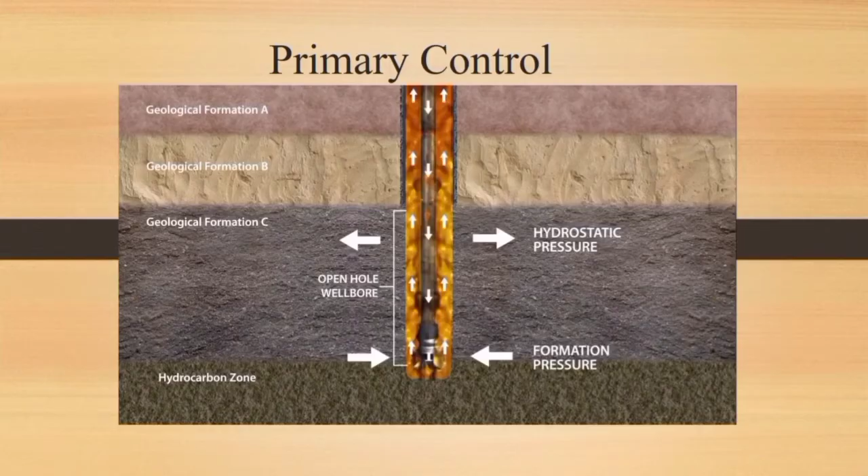Primary control is defined as control by confirming that the borehole pressure is greater than the formation pressure. It maintains a positive differential pressure, or overbalance, on the formation pressure.

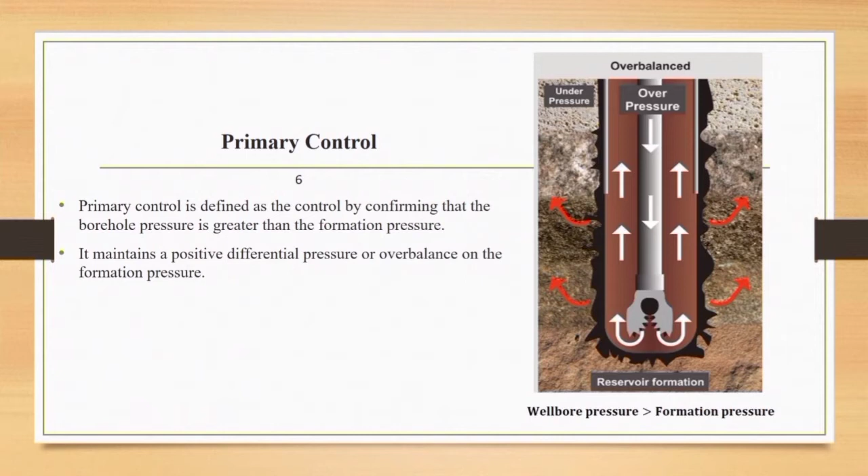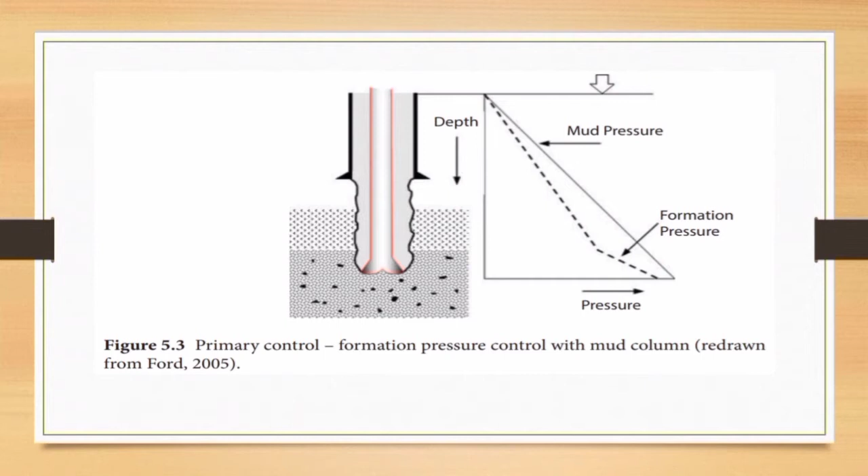Based on figure 5.3, as drilling progresses, the formation pressure increases at a constant rate. But as it reaches a new formation, the pressure spikes at a high rate. In this case, the mud pressure should be higher than the formation pressure to avoid the occurrence of a kick.

This control may be mislaid toward a higher formation pressure than wellbore pressure in two ways. The first reason is if the formation pressure is not correctly predicted. For instance, if reservoir engineers or geologists predicted the formation pressure lower than expected, the drilling engineer would have programmed a mud weight that was too low. Therefore, the bottom hole pressure would be less than the formation pressure.

The second reason is if the pressure due to the column of mud decreases for some reason, and the bottom hole pressure drops below the formation pressure. Since bottom hole pressure is a product of mud density and the height of the mud column, the pressure at the bottom of the borehole can only decrease if either the mud density or the height of the mud column decreases.

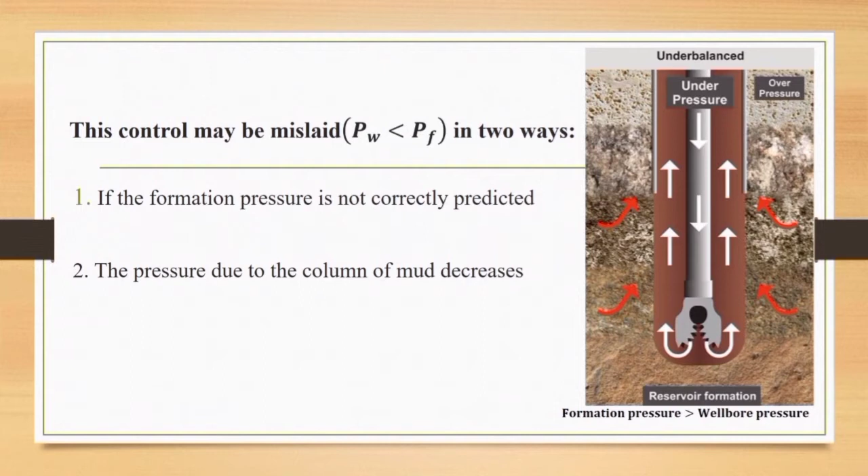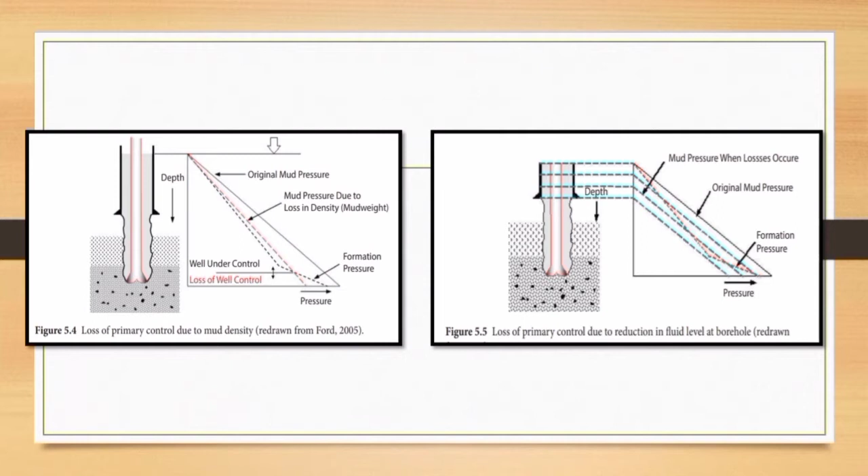There are different reasons for the reduction of mud weight and/or the hydrostatic pressure of the mud column under normal drilling operations. The following are a few of those reasons: 1. Low mud weight. 2. Reduced height of mud column.

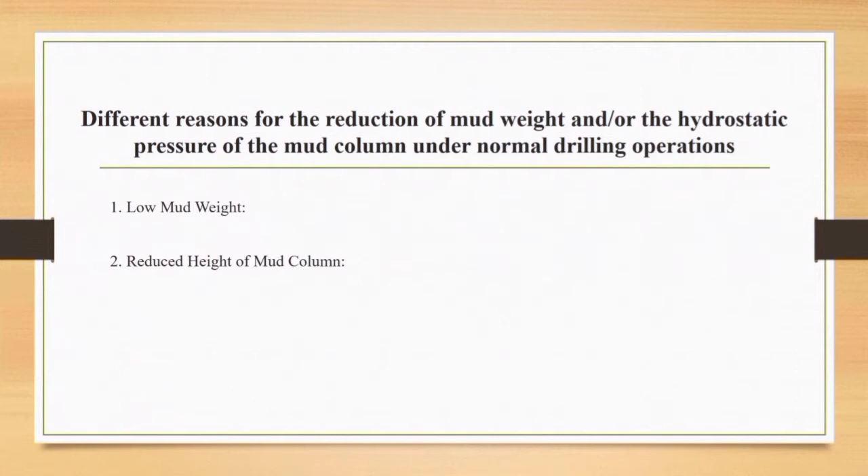1. Low mud weight. There are many reasons that influence the mud weight. It may be too low due to A. an overpressured zone which may have been penetrated, requiring a heavier than normal mud weight.

B. Gas cutting of the mud. C. Excessive dilution of the mud or water contamination. And D. Inaccurate measurement of fluid density.

The normal industry practice is to keep the overbalance pressure at around 200 to 300 psi. If there is a large amount of overbalance, the rate of penetration (ROP) will be reduced, and as a result, cost per rate of penetration over time will increase, which is an uneconomic situation.

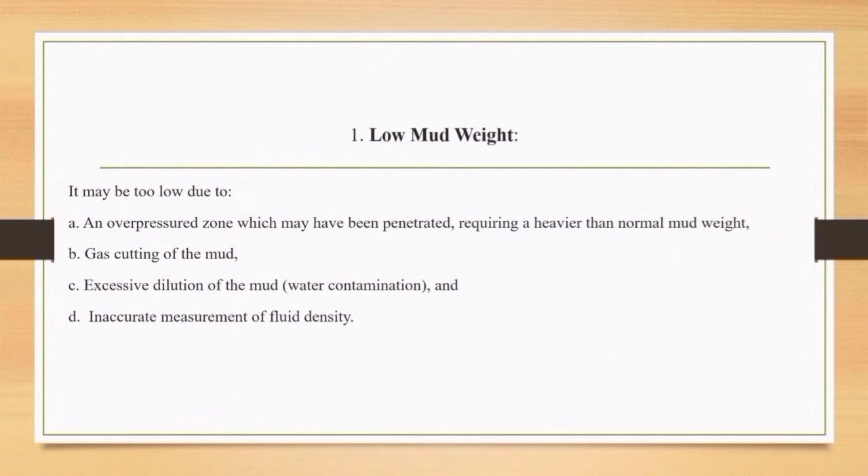If the mud weight becomes less, the developed overbalance will be less, and hence the risk of having a kick increases. B. Solids removal.

The cuttings must be removed from the mud to allow efficient drilling when the mud returns to the surface. If a very fine screen is used on the shale shaker, a large amount of weighting solids, especially barite, may also be removed.

The screen size should be selected so that the shale shaker removes only the larger particles related to the formation, while the finer material drops out and the sand settles.

C. Dilution. When the mud is being treated to improve some property like viscosity, the first stage is to water it back in order to lower the percentage of solids. Water may also be added when drilling deep wells where evaporation may be significant. During these operations, mud weight must be monitored carefully.

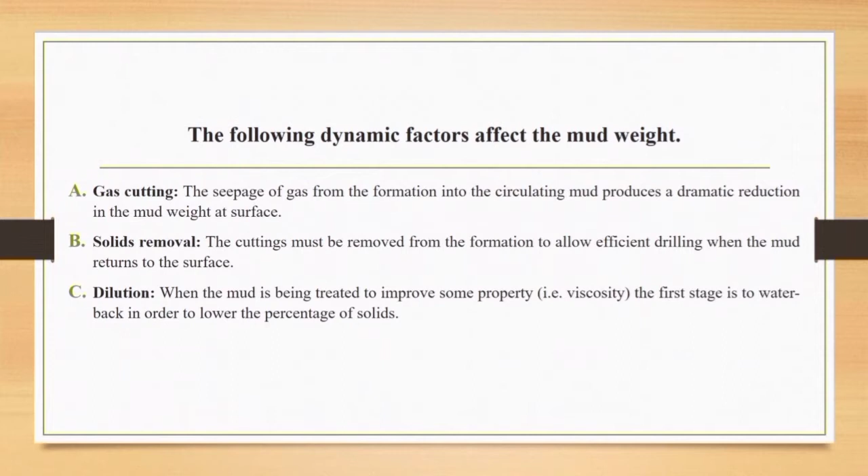2. Reduced height of mud column. Under normal drilling operations, the volume of mud pumped into the borehole should equal the mud returned. In such a case, when mud pump operations are stopped, there should not be any fluid flow from the well, and thus the level of the mud pit should not fall below the mud pit level. However, this is not always the case.

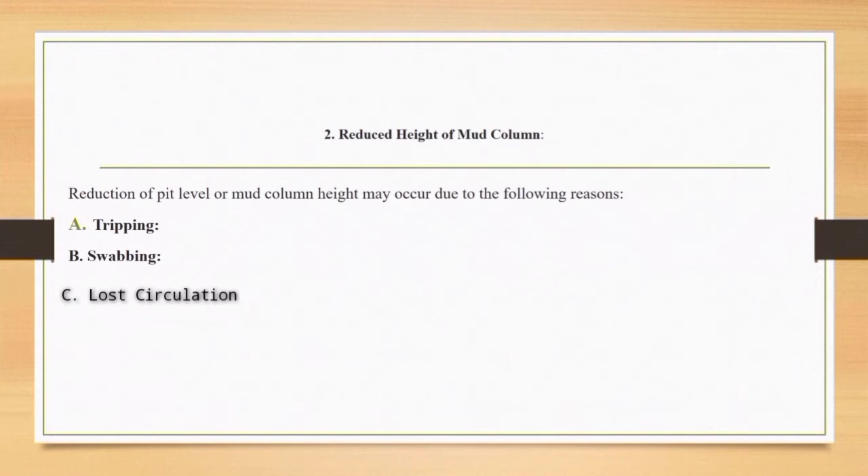Reduction of mud pit level or mud column height may occur due to the following reasons: A. Tripping, B. Swabbing, and C. Lost circulation. A. Tripping: when the drill pipe is pulled from the borehole during the tripping operation, the top of the mud column will fall down.

This results in a reduction in the height of the mud column above any point in the wellbore, which creates a decrease in the bottom hole pressure. Therefore, the open hole must be filled up while pulling out of the hole, which is done using an equivalent volume of drilling fluid.

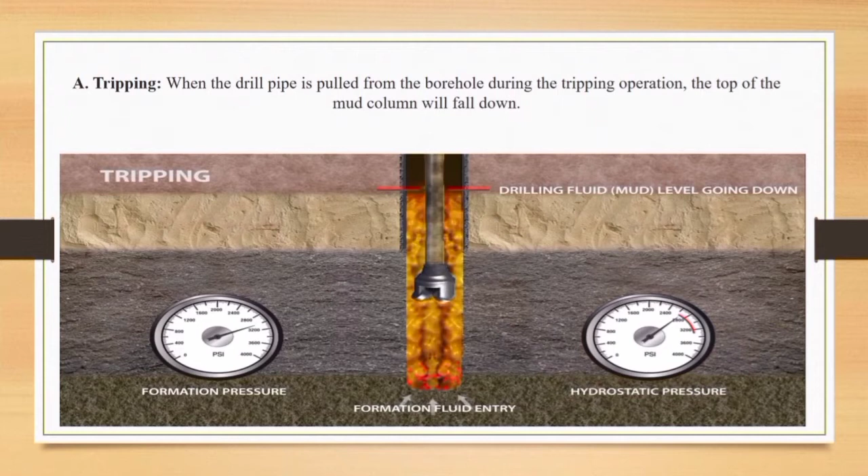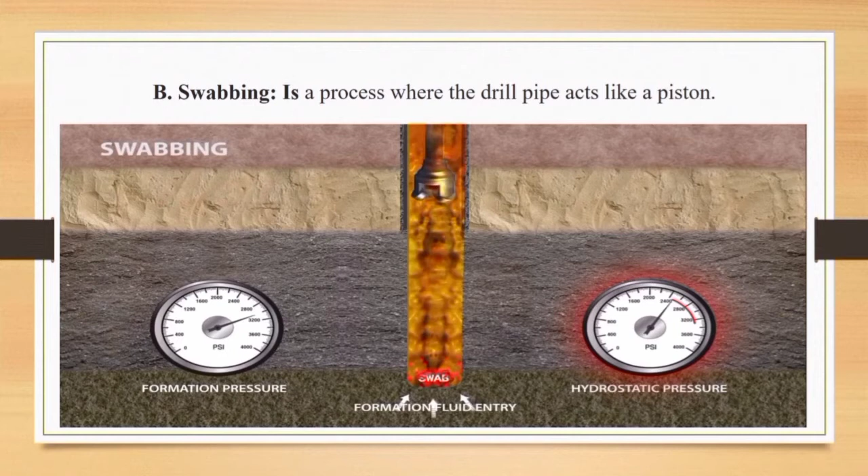Swabbing is a process where the drill pipe acts like a piston. During the upward motion of the drill pipe, it creates a region of low pressure into which formation fluids may flow. The opposite effect is known as surging, when the pipe is run into the hole.

The amount of swabbing will increase with: 1. The adhesion of mud to the drill pipe. 2. The speed at which the pipe is pulled. 3. Use of muds with high gel strength and viscosity. 4. Having small clearances between drill string and well bore. 5. Thick mud cake. 6. Inefficient cleaning of the bit to remove cuttings.

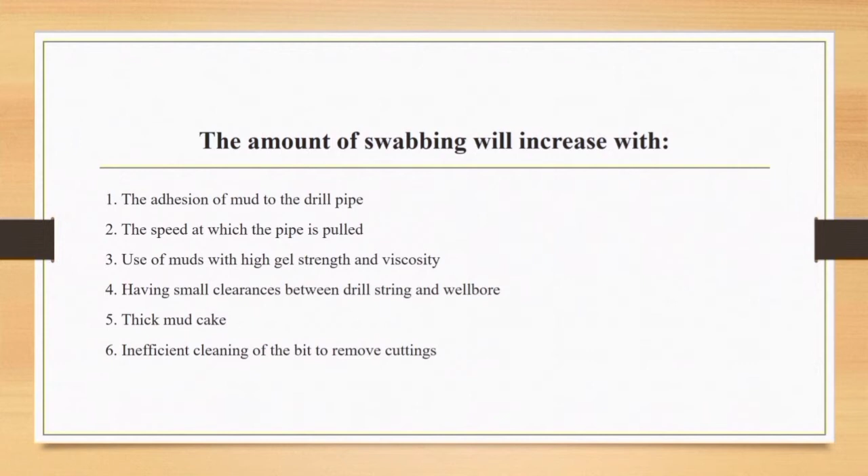Lost circulation. This occurs when a fractured formation is being drilled. Whole mud is lost to the cavities in the rock, which reduces the height of mud in the borehole. Lost circulation can also occur if too high a mud weight is used and the fracture gradient is exceeded.

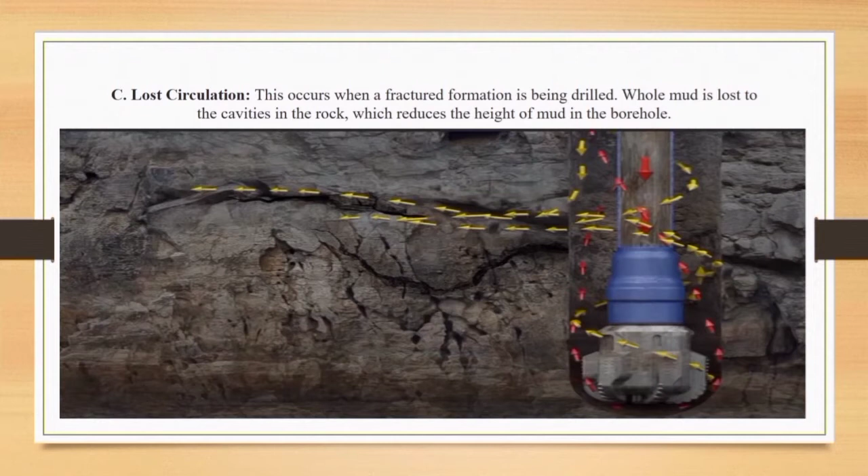Warning signals of kicks. A blowout does not usually happen suddenly. While drilling, the crew must be watchful. They should know the warning signs at the surface and be able to understand the influx at the bottom of the borehole. An alert crew can see the warning signs, and if interpreted correctly, the well can be saved by immediate correct actions.

Even though these signs may not necessarily always positively identify a kick, they do provide a warning and should be monitored carefully. Sometimes the driller observes several indicators at the surface which might be due to events other than an influx. As a result, the signs are not always final.

For example, if the drill bit enters an overpressure zone of a new formation, the rate of penetration will increase. This might happen due to the new formation encountered by the bit. On the other hand, there are some indicators that need to be monitored continuously to restrict having a kick.

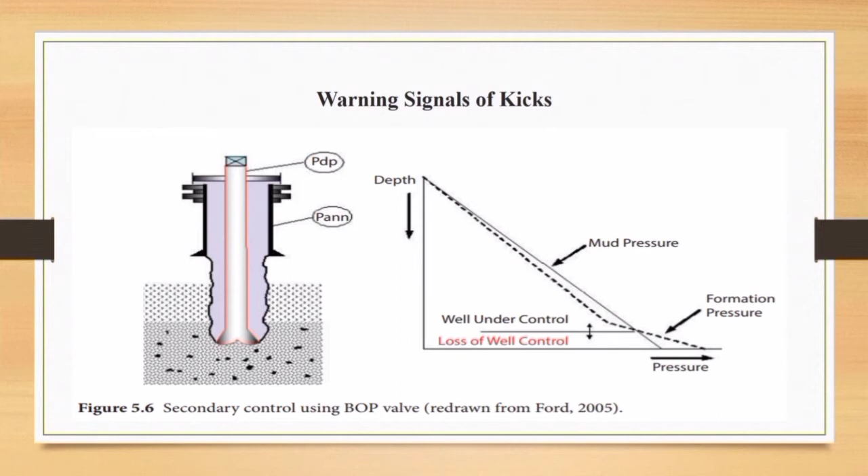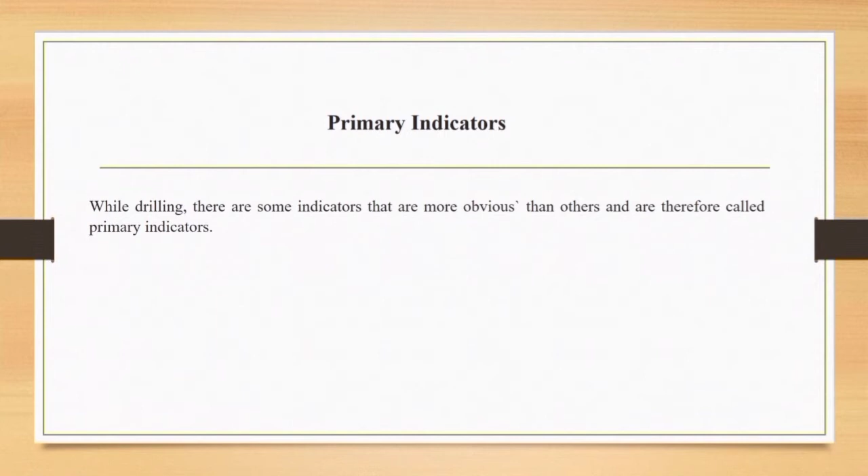Normally, there are two types of indicators: primary indicators and secondary indicators. Primary indicators: while drilling, there are some indicators that are more obvious than others and are therefore called primary indicators. The following are the primary indicators.

1. Flow rate increase. 2. Pit volume increase. 3. Flowing well with pump shut off. 4. Improper hole fill up during trips.

1. Flow rate increase. While the mud pumps are circulating at a constant rate, there should be a steady flow rate of mud returns to the mud tank or pit. If this flow rate increases without changing the pump speed, this is a sign that formation fluids are entering the well bore and helping to move the contents of the annulus to the surface.

Therefore, it is very important to monitor flow rate into and out of the well continuously using a differential flow meter. The meter measures the differential rate at which fluid is being pumped into the well and the rate at which it returns from the annulus along the flow line.

2. Pit volume increase. If the mud flow rate into and out of the well is constant, the volume of fluid in the mud pit should remain constant. A rise in the level of mud in the active pits is a sign that some mud has been displaced from the annulus by an influx of formation fluids. The level of mud in the mud pits is therefore monitored continuously.

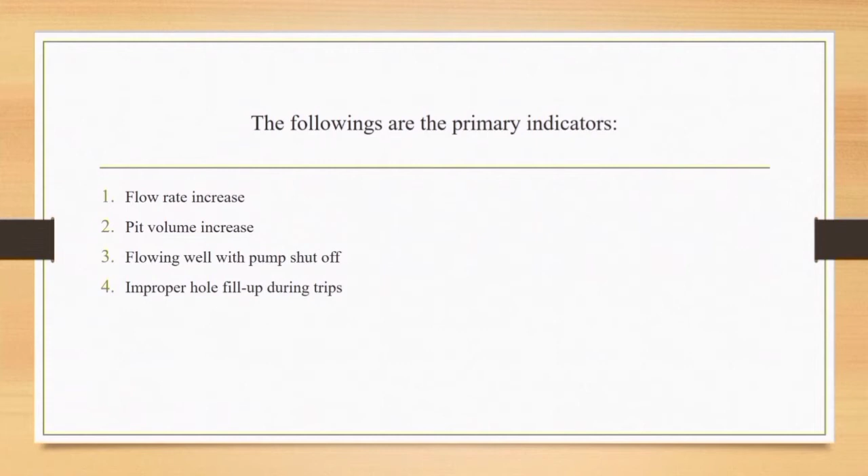Secondary indicators. While drilling, there are some indicators that are not conclusive and may be due to other reasons. The following are the secondary indicators: changes in pump pressure, drilling break, gas, oil, or water cut mud, and reduction in drill pipe weight.

Changes in pump pressure: an entry of formation fluids may cause the mud to flocculate and result in a slight increase in pump pressure. As flow continues, the lower density of the influx will cause a gradual drop in pump pressure. As the fluid in the annulus becomes lighter, the mud in the drill pipe will tend to fall and the pump speed will increase.

Drilling break: a drilling break is an abrupt increase in the rate of penetration. It should be treated with caution. If the drilling parameters have not been changed, the increased penetration rate may be attributed to a change from shale to sand, more porous and permeable, and so having a greater kick potential.

Or it may be due to reduced overbalance or increase in pore pressure. The drilling break may indicate that a higher pressure formation has been entered. An increase in drilling rate may also be due to a change from one formation type to another.

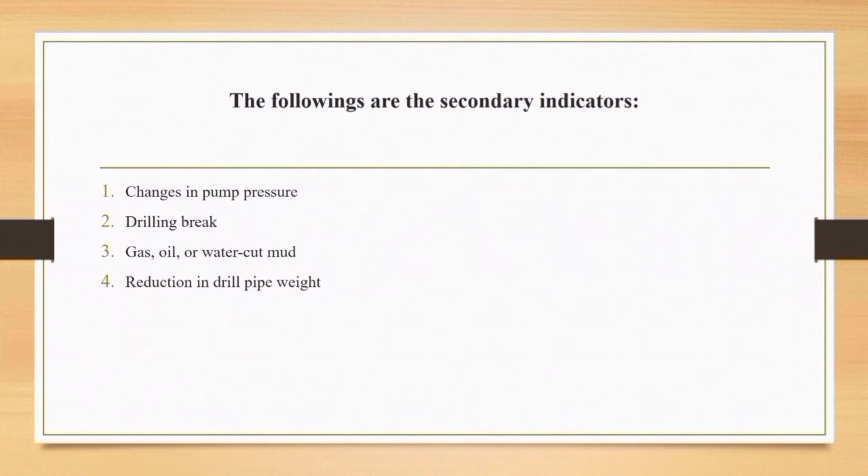Secondary well control: if there is a pit gain observed at the surface, it means that the kick has been identified by the drilling personnel. This pit gain indicates that primary control over the well has been lost. In such a situation, all normal drilling or tripping operations must be terminated in order to concentrate on bringing the well back to primary control.

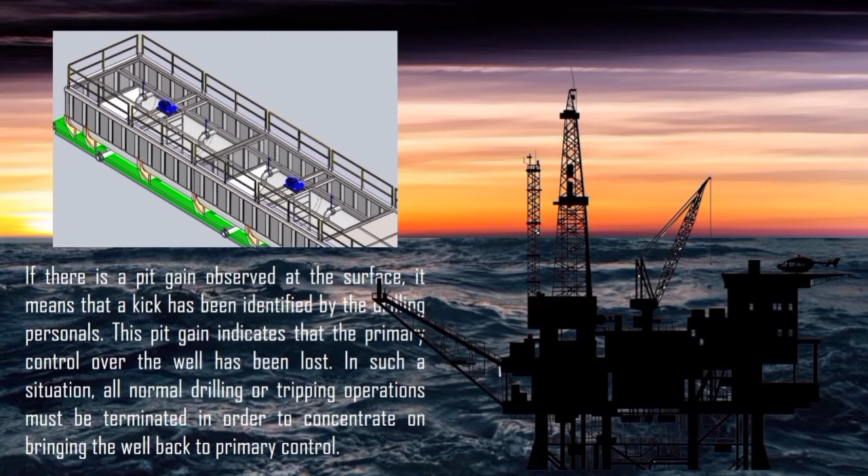Secondary well control: when primary well control fails, it causes a kick or wellbore influx coming into the wellbore. This situation needs special equipment called the BOP, or blowout preventer, to control the kick. The purposes of this control are: first, to stop the flow of unexpected fluids into the wellbore; second, to allow the influx to be circulated to the surface and safely discharged; third, to prevent further influx to the downhole. We also have steps for secondary control.

Step 1 is to close the annulus space at the surface with the help of the BOP valve to prevent further influx of the unexpected formation fluid.

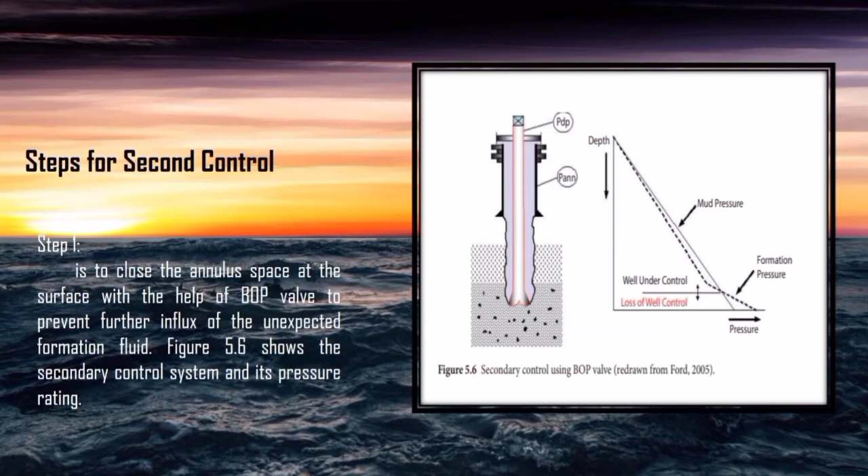Figure 5.6 shows the secondary control system and its pressure rating.

Step 2 is to circulate the heavy mud through the drill string and annulus to displace the influx and original mud. Step 3 is to allow the drilling mud to flow in a controlled way so that no further influx occurs at the bottom of the borehole.

In such a case, the heavier mud should prevent further influx of formation fluid when drilling ahead, which is now under primary control. Secondary control is only required in drilling exploration wells where formation pressures may not be known.

Well killing procedure. The first method, claiming to be the simplest and most effective technique for controlling kicks and should be used anytime a formation fluid influx is circulated out of the well, is the drill pipe pressure method. This method does not require that the volume or type of the influx fluid be known, and it works equally well for gas, oil, and water kicks.

The kill procedure is summarized as follows. 1. Pick up Kelly until the tool joint is above the rotary table. 2. Shut down the pump and check for flow. 3. Close the annular BOP. 4. Close the adjustable choke. 5. Record the shut-in drill pipe and casing pressures, pit volume gain, depth, and original mud weight.

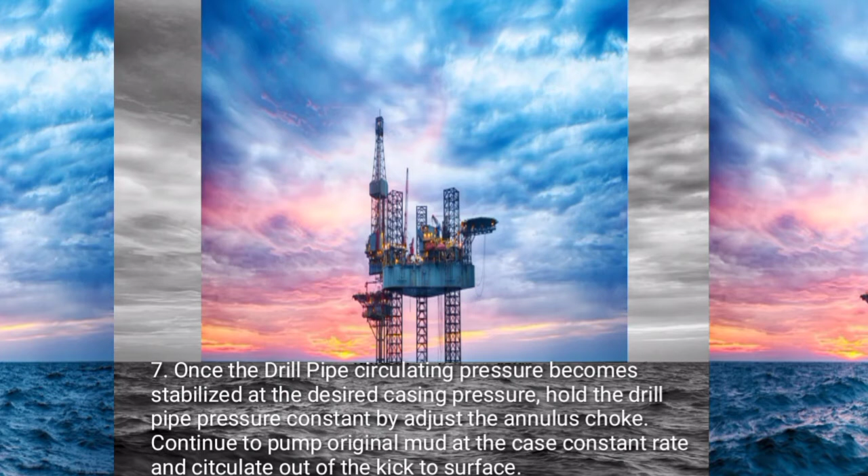7. Once the drill pipe circulating pressure becomes stabilized at the desired casing pressure, hold the drill pipe pressure constant by adjusting the annulus choke. Continue to pump the original mud at the same constant rate and circulate the kick out to surface.

8. Pump kill mud of heavier density to the bit. Make a downward correction in the drill pipe pressure as described in the following section.

9. Continue circulating at a constant pumping rate until mud of the required density to kill the well occupies the wellbore. Lastly, stop circulation and check for flow.

In the above procedure, the kick is circulated out in step number 7 using the original mud weight, and then kill mud is circulated to kill the well.

This approach of weighting up the mud is called the driller's method, and it offers the advantages of relative speed and simplicity, but generally results in a higher maximum surface pressure than other methods.

If insufficient barite is on hand to weight up the mud, this method should be used rather than suspending operations until barite can be delivered.

If sufficient barite is available on the well site, step number 7 may be deleted, and the well is killed by circulating kill mud as in step number 8.

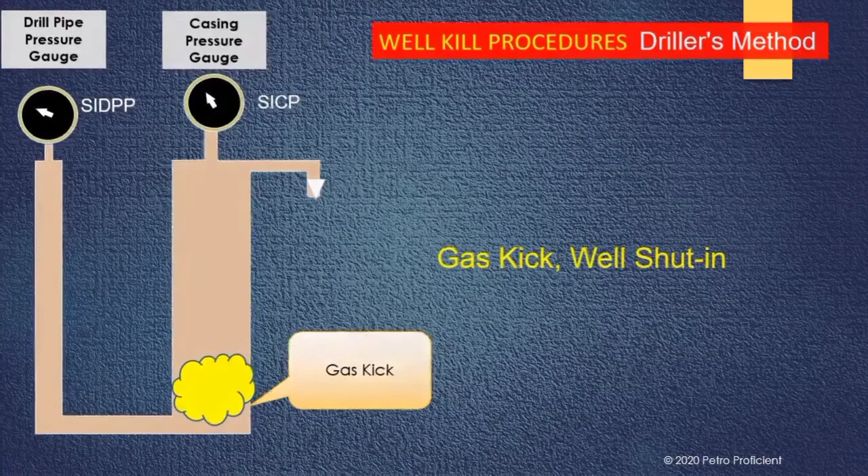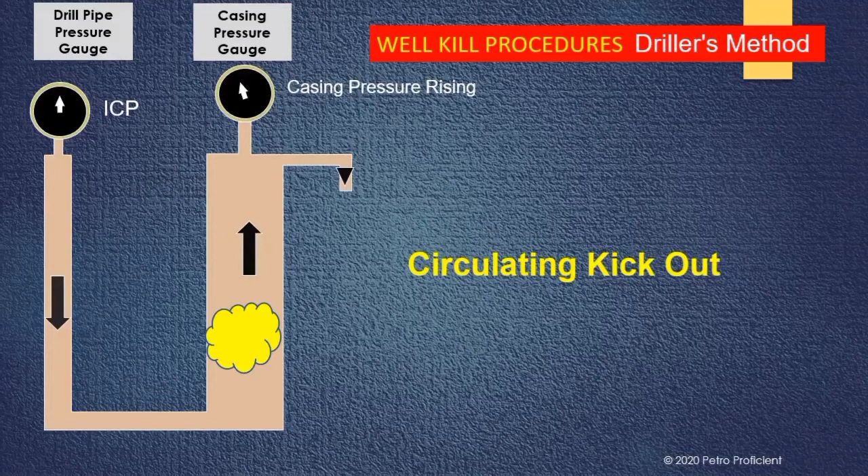After recording the SIDPP and SICP, the driller initiates the first circulation, which is with the original mud present in the well to circulate the influx out. At the end of first circulation, the influx is out of hole, and at this stage SICP equals SIDPP, to confirm that the kick has been circulated out and no more gas is in the well. At this point, the driller lines up to circulate the kill mud.

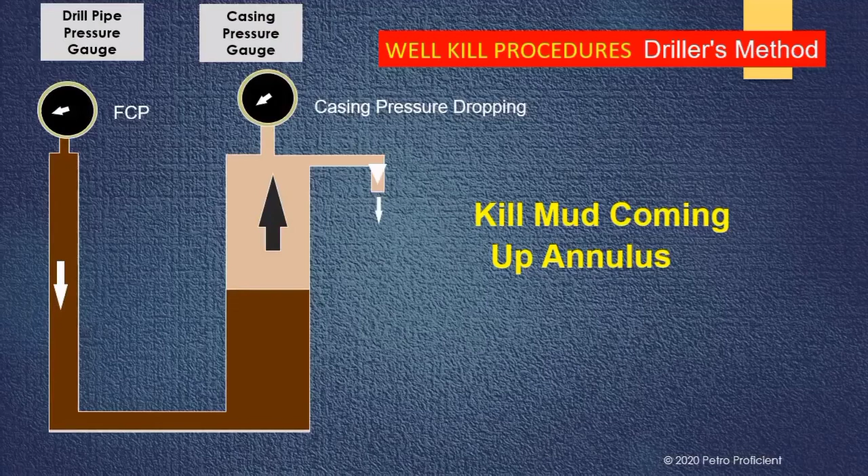In wait and weight method, normally, only one circulation is needed to kill the well.

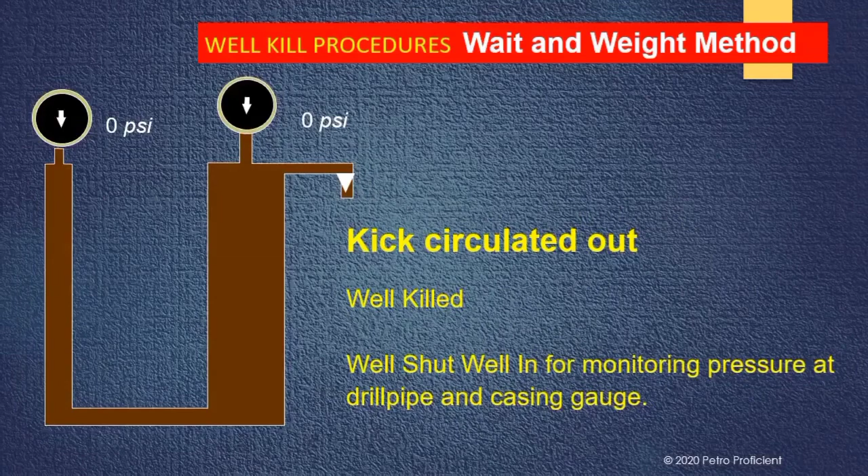Blowout prevention equipment. A blowout preventer, or pronounced as BOP, is a specialized valve or similar mechanical device used to seal, control, and monitor oil and gas wells to prevent blowouts or the uncontrolled release of crude oil or natural gas from a well. They are usually installed in stacks of other valves.

Blowouts are a particular hazard offshore because not only are they a danger to life and limb, but in the case of any oil blowout, they also generate an oil leak and much unfavorable publicity. The majority of blowouts, however, result from the sudden release of gas or the uncontrolled release of crude oil from the well after pressure control systems have failed.

Blowout prevention. Nowadays, companies use blowout prevention equipment at the drilling site in case of a bad kick or a high upward pressure formed by the fluid surging up the well. To maintain the pressure balance, drilling engineers use drilling mud to maintain equilibrium between the upward and downward pressure to avoid any breaches in valves that can lead to overflow of energy resource causing severe damage.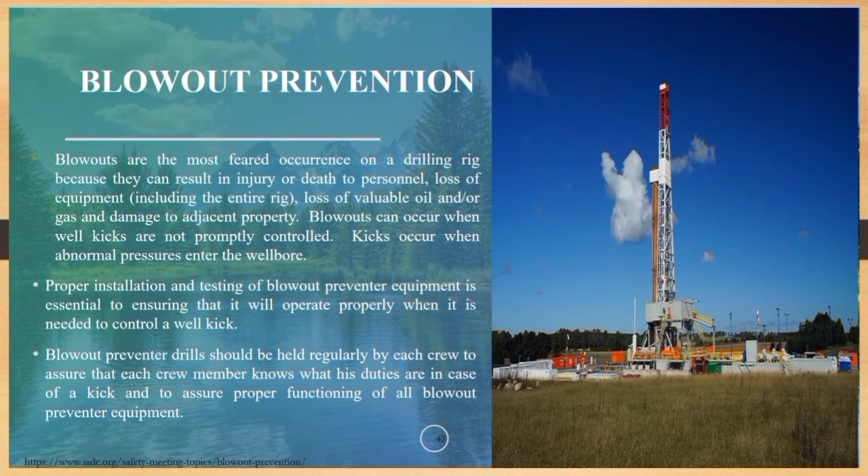But what is the role of BOPs, or blowout prevention equipment, in drilling operations? BOPs play a crucial role in oil drilling. While most individuals understand the basic functions of this device, that is not enough. There is a need to understand each component of BOPs, their individual functions, and how they work together for increased safety and efficiency.

Taking a look at the basic components of every BOP, first we have the accumulator. The accumulator is the main control unit of a blowout preventer. It is responsible for the control of all systems that interconnect in preventing emergency situations. It is activated based on hydraulic pressure. The accumulator houses hydraulic reservoirs, control valves, pumps, control manifold, and compressed gas bottles, among other features.

And also we have the annular BOP. The annular BOP is responsible for closing the space around the drill pipe. It does this by controlling the airflow to prevent mud, without affecting the operation of the system. It is effective in maintaining a seal around the drill pipe during the process of drilling. The annular BOP is on top of the other BOPs to ensure efficient airflow control.

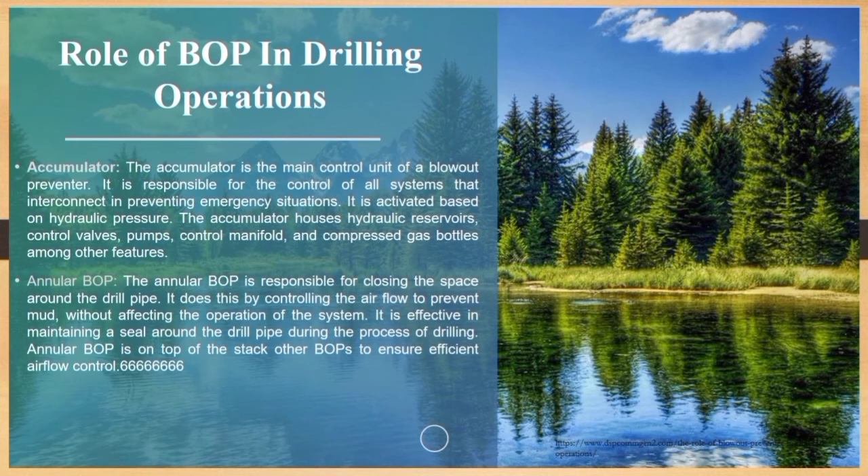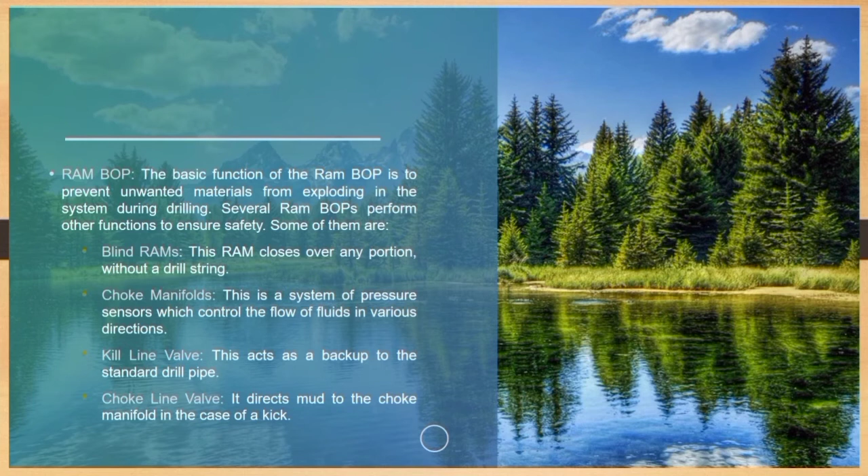Next is the RAM BOP. The basic function of the RAM BOP is to prevent unwanted materials from exploding in the system during drilling. Several RAM BOPs perform other functions to ensure safety. Some of them are blind rams, which close over any portion without a drill string. Choke manifolds: this is a system of pressure sensors which controls the flow of fluids in various directions. And next is the kill line valve. This acts as a backup to the standard drill pipe.

Blowout prevention equipment structure. As you can see in the picture, here is the structure of blowout prevention equipment. We have aluminum thread protectors, carbide ball seat for superior sealing and equalizing, bleed-off valves, bleed-off or grease injection manifold, and bumpers to protect the BOP's valves and body.

Invertible rams to suit operations, monoblock forging, easily accessible equalizing and bleed-off valves, durable powder coat or painted finish available, external piston indicator, manual backup actuators, hydraulic actuator sliding arms to service or replace rams, hydraulic actuator lug lock design to allow quick and easy access to rams, and integrated lifting points.

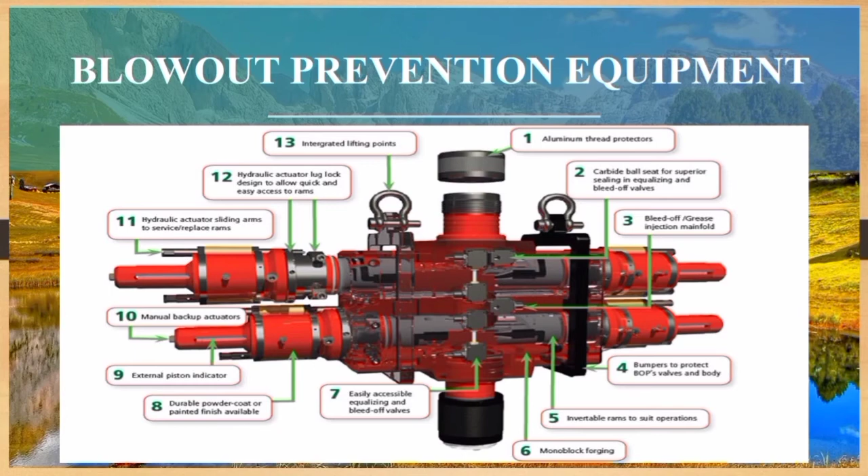Blowout preventer. Blowout preventers are the final foolproof measure to contain the blowout in case there is a severe kick from the well. BOPs essentially shut down the fluid supply to and from the well as a last ditch effort to save a kick from turning into a blowout.

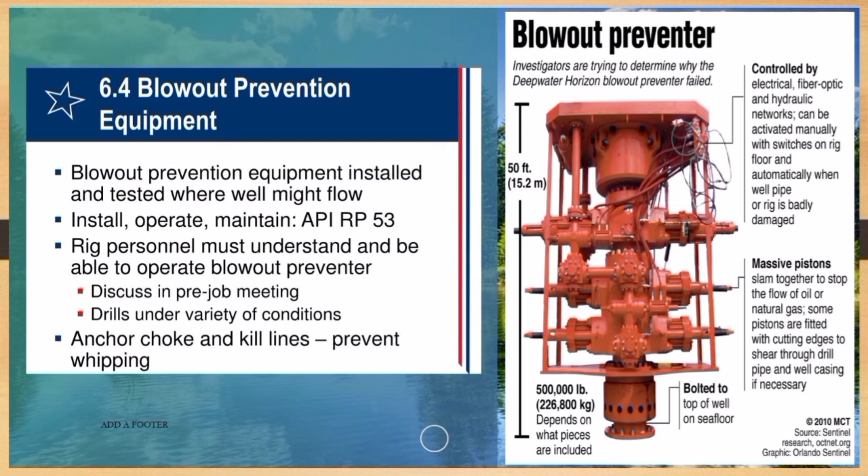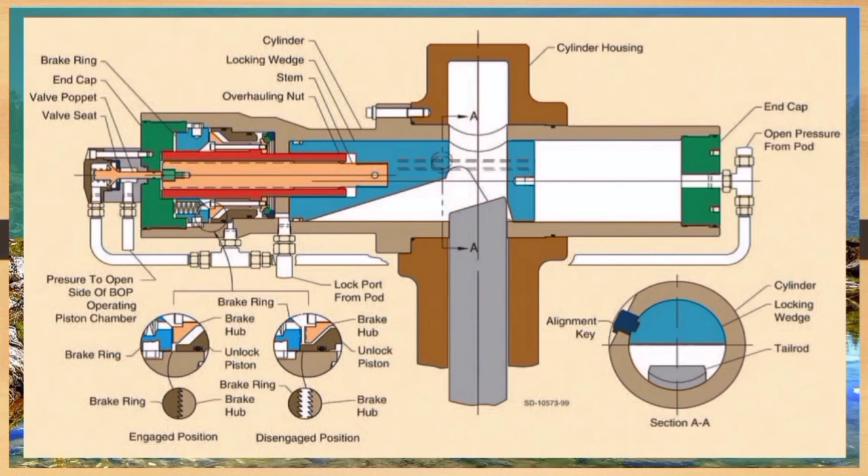A BOP stack arrangement is several blowout preventers connected together one on top of the other. For example, in a multiple ram configuration, one set of rams might be fitted to close on 5 inch diameter drill pipe, another set configured for 4.5 inch drill pipe, a third fitted with blind rams to close on open hole, and a fourth fitted with a shear ram that can cut and hang off the drill pipe as a last resort.

A common BOP stack arrangement: first the annular preventer, next the blind ram preventer, next the pipe ram preventer, drilling spool (optional, also known as drilling cross), kill line, choke line, and fill line, and lastly the bell nipple.

There are several considerations on how to arrange a BOP stack. First, the BOP stack must be suitable for the drilling operation. The stack should be able to serve the stripping operation, not just shut the well in. Pressure rating must be higher than expected surface pressure when a well control situation occurs. Excessive BOP rams cause difficulty to handle and maintain, and additionally the cost of the BOP stack is more expensive. Sour gas, temperature, and surface conditions directly affect the elements in the BOPs. The best BOP stack arrangement is the one suited for the operation within safety limits.

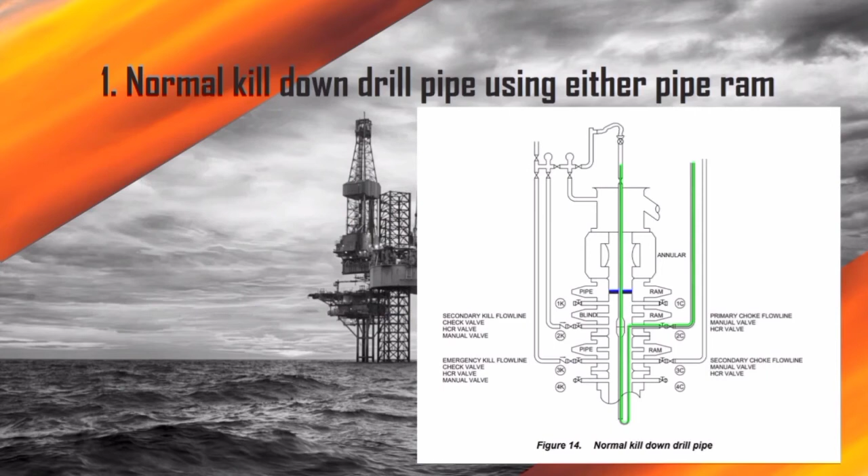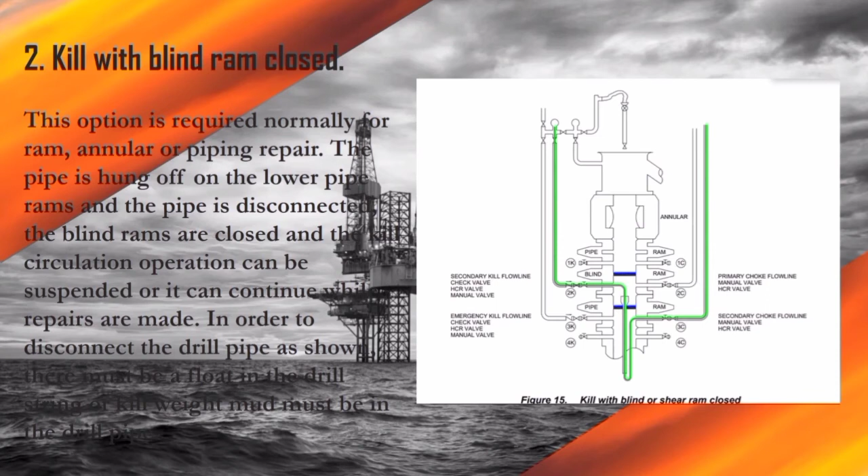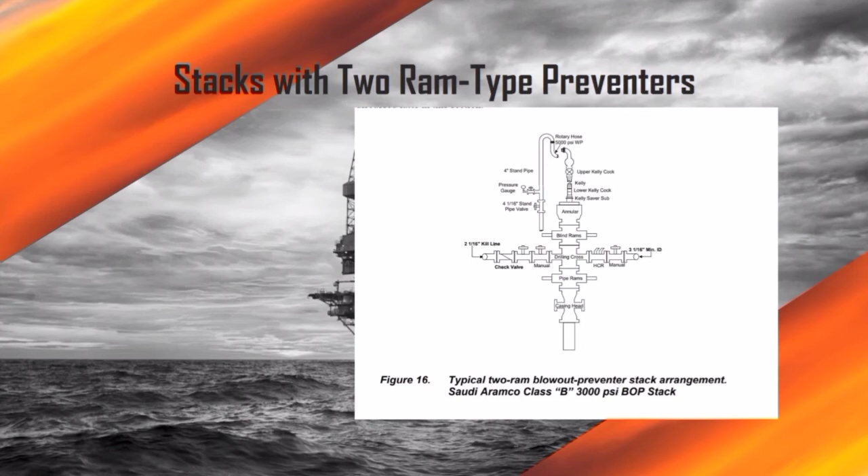This is an example of a stack with 2 ram type preventers, from Saudi Aramco Class B 3000 PSI BOP stack. Where only 2 sets of rams are used, there are 4 arrangements for the blowout preventer stack as shown next. The discussion assumes the well is under pressure.

There are a number of advantages for this stack arrangement. To drill pipe into the hole, the upper rams may be changed to pipe rams. When this is done, the drill pipe may be reciprocated through the upper rams while maintaining the lower rams as a reserve. This is applicable for arrangements number 1 and 2.

With two pipe rams and some pipe in the hole, the drill pipe can be stripped back to the bottom. This is applicable for number 1. If a leak develops above the rotary, the drill pipe may be suspended in the lower rams, and by closing the upper blind rams, the hole can be circulated. This is for number 1, and also holds for number 2. There is sufficient distance between rams to place a tool joint box.

Since most kicks occur with some pipe in the hole, the lower pipe rams may be closed for repairs with the drilling spool or flow line. This is applicable for number 1.

When blind rams are closed, these permit use of the drilling spool, flow lines, and chokes, applicable for number 1, 2, and 3. With either of the rams closed, this permits the use of the choke, flow lines, and chokes, applicable for number 2 and 3.

Drill pipe rams can be changed to casing rams while the drill pipe is out of the hole, for 3 and 4. If any serious leak develops in the stack, the drill pipe can be set on bottom or dropped and the well closed in as a last resort.